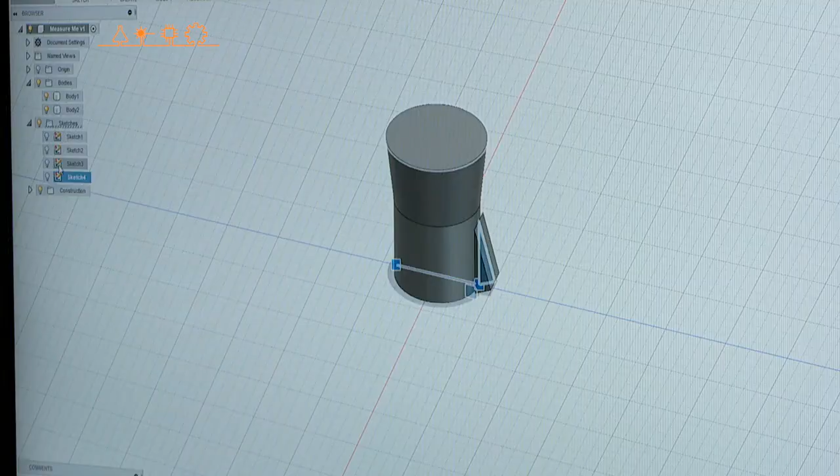Recently we've been working on a lot of printing parts that fit onto various objects that we have around the house and the workplace, trying to figure out ways to make wrenches that we may have lost, and experimenting with the different ways that you can interface those objects with a 3D model on the computer.

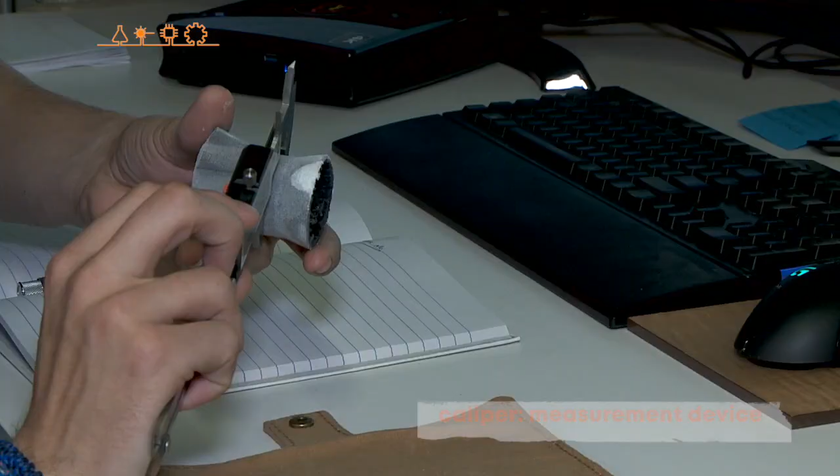And we've come up with this challenge. Tom here is going to take an object and measure it with a bunch of different measuring tools, and then try to recreate that object on the computer. Ben is going to turn around and actually take that piece of hardware and scan it using 21st century technology, so we can see which one is the quickest and also which one gives the best result at the end of the day. Let's go ahead and do it.

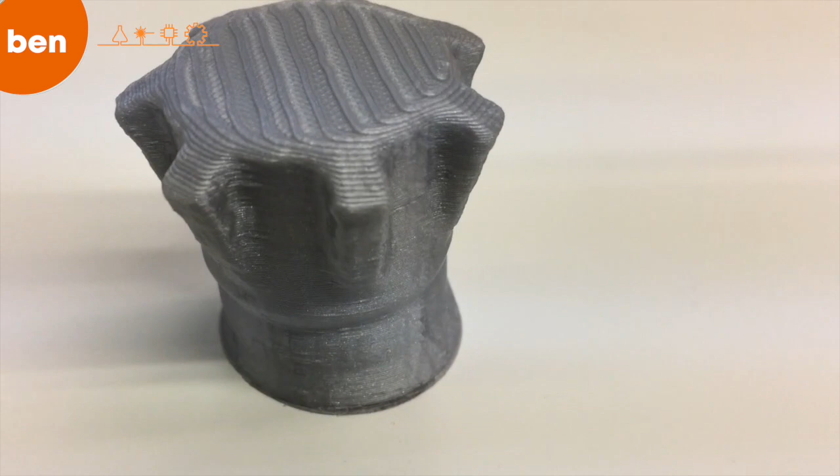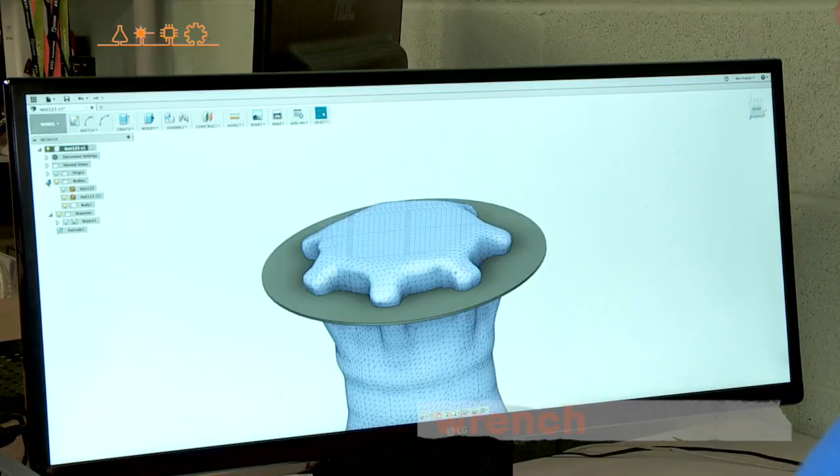So Tom and I both took a crack at this bathroom tap, modeling it in two different ways, and then creating tools that fit over these taps to see which process works best.

Yeah, and I think it's pretty evident that mine's more angular and more geometric. That's because the way that you measure with calipers and a ruler lends itself to that, specifically talking about the diameter of a circle, whereas yours is slightly more flowy and organic because it's more custom, it's more arbitrary. It's a little lumpy. And I think the best way of saying this is that different techniques lend themselves to different things.

Of course. What we can say here is that my process is a lot more succinct and accurate, so if you're doing something small, that's why you would use this process. Whereas your process is, as you've said, slightly more blobby and organic, which means that you'll use it for something bigger and more arbitrary. Yeah, and if you see when you put your wrench on your faucet, it fits perfectly.

There's not a whole lot of gap there. If you try and put mine on, it doesn't. It does work, it works in a pinch. But it also took 3 times the length of time to make. Yes, mine took 20 minutes to model this out and make a wrench for it. Whereas mine took somewhere in the realm of 5 or 6 minutes because it's relatively easy to model.

And I don't think my tool works even on yours from a standpoint, so the function isn't the same. No. So you do have those trade-offs, and we talked about size and complexity, but also accuracy is one of those things too, where this is a copy of our tap that we made earlier, that we modeled earlier, and they're the same but different. So his tool works on mine, but my tool doesn't work on his. So you can see the drawbacks that you have there.